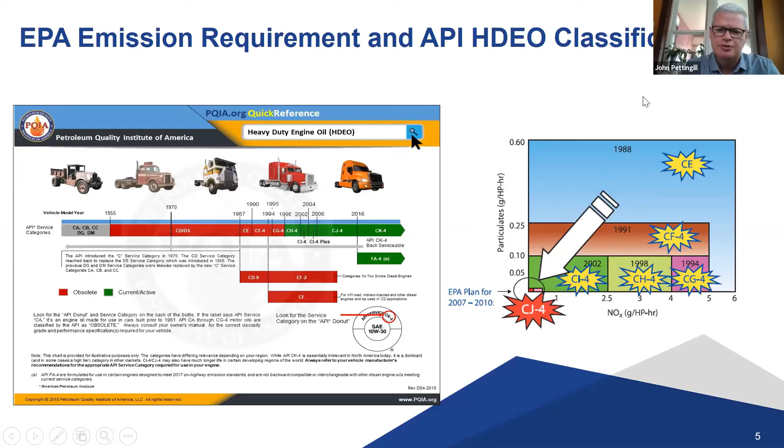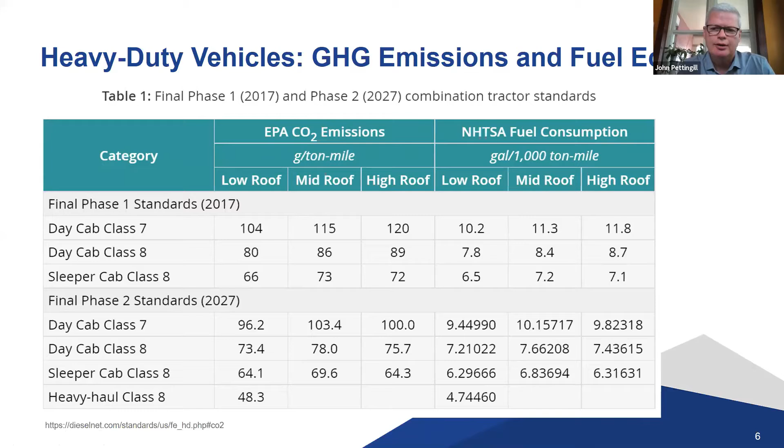And likewise, as CO2 emissions go down, fuel consumption has to go down as well. It's only logical—you burn less fuel, you make fewer emissions. This will be enabled by improved technology. The same thing is going on with on-road vehicles. There are some contributions that heavy-duty engine oils can make themselves, and we'll get into that a little more here, as well as in my presentation that follows.

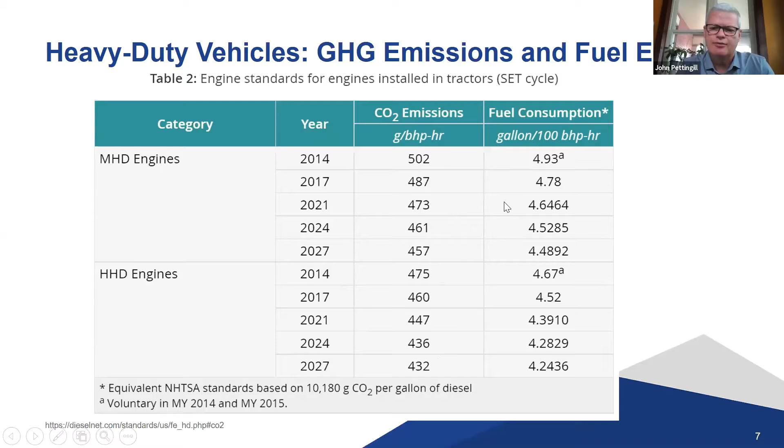So again, for either medium or heavy-duty engines, on a gram per brake horsepower hour basis, the emissions will need to come down. You see from 2014 to 2027 there's a change for these as well as heavy duty. They'll all be falling, as well as fuel consumption, and there will be these requirements to meet these new specifications.

So I talked about the evolution of heavy-duty engine oils and the technology that changes with them. The current specification in the heavy-duty world, the API specification as I mentioned, is CK4 and its lower viscosity equivalent, which is FA4. FA4 is the new fuel economy standard, which enables fuel economy essentially because it's lower viscosity.

So lower viscosity oil requires less energy to circulate through the engine. And if it requires less energy, it'll burn slightly less fuel. We'll get into some of the specifics of that in the following presentation. But what's important to know is that the requirements to meet the FA4 standard, and all the engine tests and bench tests, the qualification it has to go through, is as rigorous—it's identical to the CK4 test.

And if you're wondering, and you probably are, what's PC11 anyway, and why does it have this in parenthesis—it's because before a new oil category is officially adopted by the API, it's given a proposed category name. So that's what PC is: proposed category number 11.

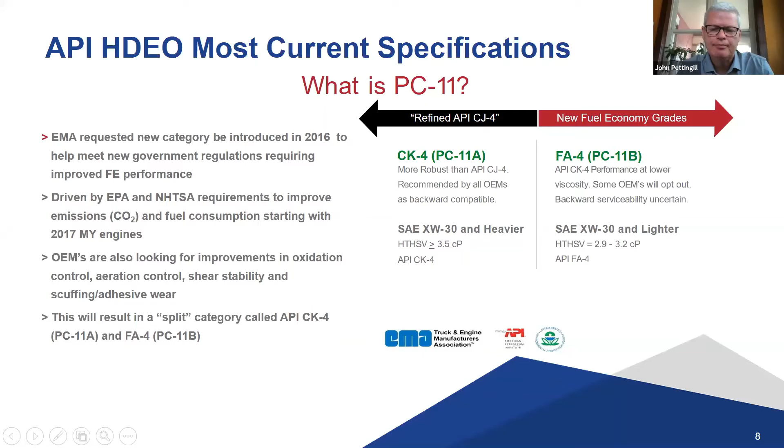So we have a split category, as I mentioned, and it resulted in what we have today as API FA4 and CK4. All right, so thank you for your attention on this one.

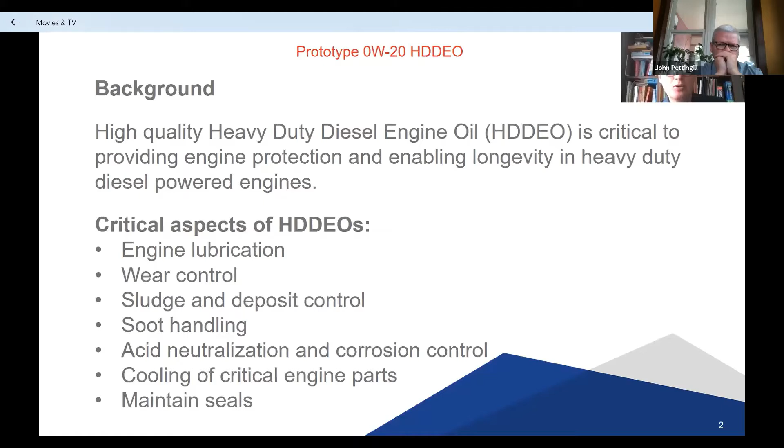Some of their critical aspects are engine lubrication, of course, the primary one, but also wear control, sludge and deposit control so that the engine runs as it should, operating properly. These diesel engine oils have to provide soot handling, acid neutralization, and corrosion control to prevent corrosion and rust in the engine. They have to provide cooling of critical engine parts, and they've also got to maintain seals.

But in addition to this, not just engine protection, but the engine oil itself must maintain performance characteristics. It's got to resist change in viscosity, so it doesn't go too much above or too much below its intended and designed grade. It has to control oxidation, which is more important now that engines are running hotter than they used to. It has to resist volatility at high temperatures so that it stays as a liquid, not going into the vapor state. And above all, it's got to maintain its function at wide temperature ranges, so multi-grade oils have to protect at very low temperatures as well as very high temperatures.

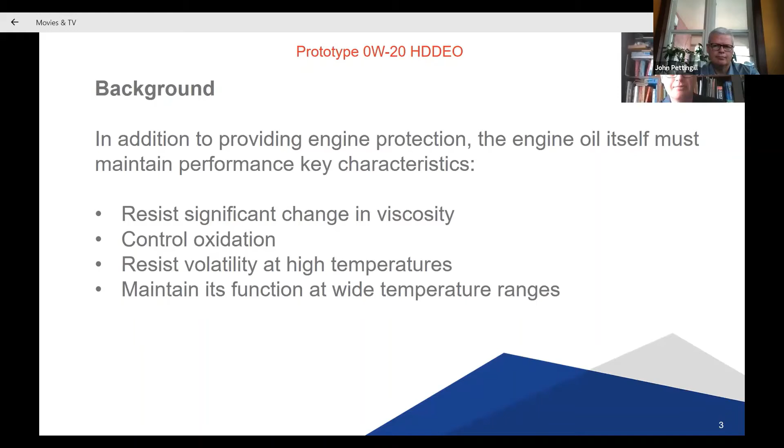So what's the case for lower viscosity heavy-duty engine oil? Well, lower viscosity engine oils enable improved fuel economy. Now, the lowest viscosity currently allowed for API licensed and OEM approved heavy-duty engine oils in the market today in North America are the API FA4 products.

They're available as 5W-30 and 10W-30 viscosity grades, defined by their HTHS limits of 2.9 to 3.2 centipoise. HTHS is high temperature, high shear - it's a simulation of viscosity at high temperatures under extreme loading conditions.

By comparison, traditional heavy-duty engine oils need to meet a minimum of 3.5 centipoise or higher, but that depends on their viscosity grade or OEM requirements. In some cases, those minimum requirements are 4.2 for, say, a 15W-40.

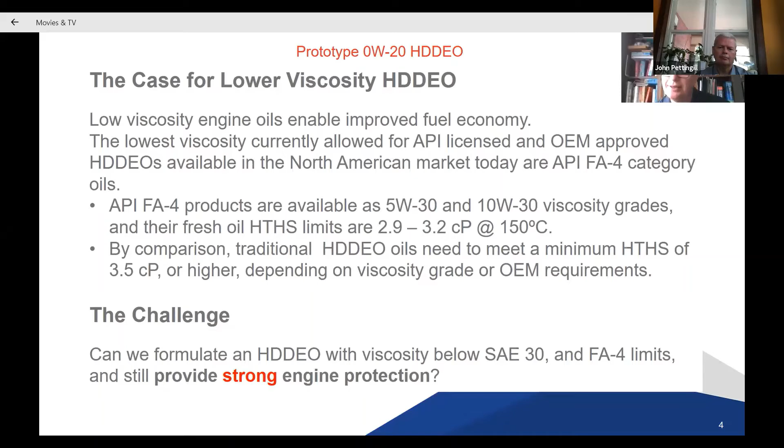So the challenge to us is, can we formulate a heavy-duty engine oil with viscosity below SAE 30 and FA4 limits and still provide strong engine protection?

Well, in addition to fuel economy benefits, lower viscosity engine oils that maintain engine protection reduce vehicle operating costs and improve vehicle exhaust emissions. You're burning less fuel, so it's less emissions.

So how do we know this? Well, within the engine oil business, there's general industry acceptance and agreement on the correlation of engine oil viscosity with fuel consumption - that lower viscosity engine oil enables improved fuel economy. Even in the case of FA4 oils, which were launched at the same time as the most recent category of CK4, there was no actual fuel economy test required to demonstrate fuel economy capability, because the industry consensus is very strong.

So where you have a higher grade with a higher HTHS, you will use more fuel compared with a lower grade having a lower HTHS. Depending on the application, these differences from, say, a 15W-40 to a 10W-30 could be 1%, or 15W-40 to a 10W-30 FA4 could be up to 2%, sometimes even more. It's very application dependent, and in the real world it's everything keeping all other things constant except for the type of engine oil. But this correlation is a good fit, and there's good industry consensus for this.

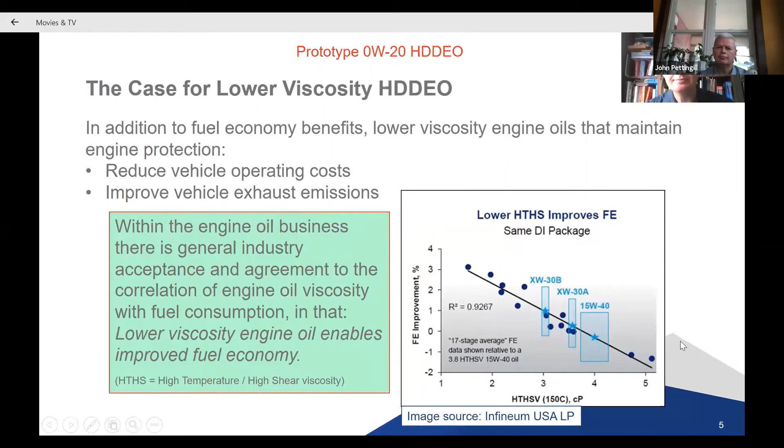So Petro-Canada Lubricants R&D has developed two prototype 0W-20 formulations for field trial evaluation. We evaluated our products in a field trial. Just note that there are currently no 0W-20 heavy-duty engine oils commercially available in this grade in the North American market.

So the viscosity grade is defined by its kinematic viscosity at 100 Celsius. The traditional grades that you're probably used to seeing are 40, 15W-40, or 10W-40, which are higher viscosity. There's been a recent industry acceptance and OEM approval of the SAE 30 grade, which includes 5W-30s, 10W-30s, et cetera.

So we are testing even lower to enable improved fuel economy in the SAE 20 region. Our two test oils that we are going to show you a demonstration for are in this area here.

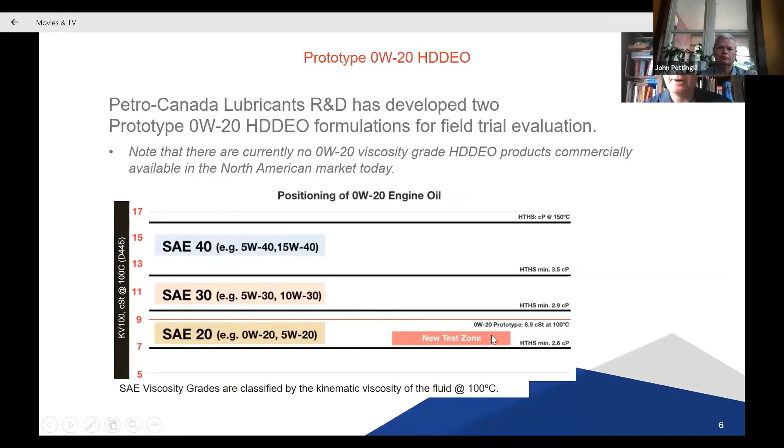But it's not that easy - there are formulation challenges. You don't want to just go into a test program or field trial without giving some thought as to what you need to still protect the engine. So the main formulation concerns in this case are the low HTHS value, because this could risk oil film strength required to protect critical engine parts.

And the base oil - the low base oil viscosity may also be a risk to film strength, and increased volatility of the oil under high operating temperatures and conditions. However, the risk has been alleviated in part with the use of proven performance additive technology that is common to API CK4 products.

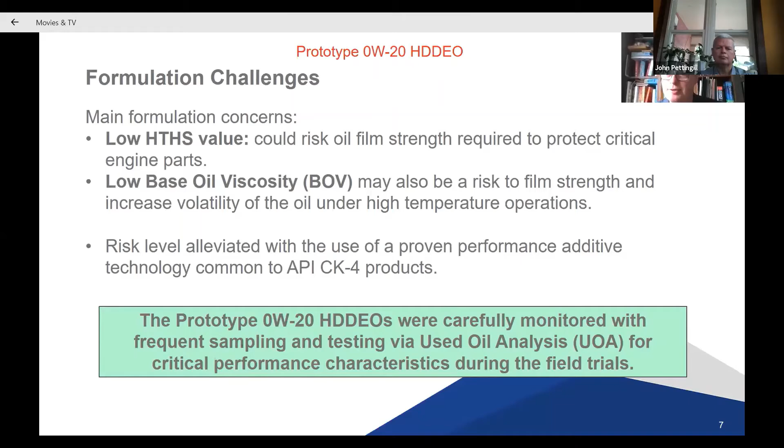So you go ahead and design the oil, but it's a very novel approach. And so the prototype 0W-20s were very carefully monitored with frequent sampling and testing through our used oil analysis program to check for critical performance characteristics during the field trial. You want to make sure that these oils are going to hold up.

Just looking at some basic formulation details - first of all, to eliminate potential bias when it comes to the testing, these were assigned test oil codes so that the people in the shop who were changing the oil in the trucks didn't know what these really were. We assigned test oil names gray and beige to them.

Now, because we're looking at two different 0W-20 formulations, they were equal in some aspects in that they both had the same base oil viscosity target and the same kinematic viscosity at 100. They both were made using group 3 base oils to meet the 0W and 20 requirement, and they both have the same performance package for additive technology.

They differ in the type of viscosity modifier used. Test oil gray has a comb polymer, whereas test oil beige has a star polymer. Otherwise, the physical characteristics needed to meet 0W-20 viscosity requirements are very similar.

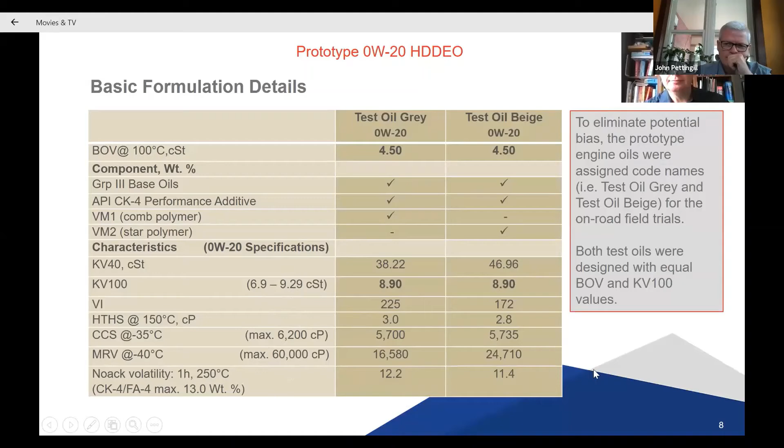Now, as I said, we did put these to the test, and they were really put to a severe test because we feel that if they can make it under really heavy conditions, then lighter loaded conditions shouldn't be a problem. Testing trucks were very similar to what you see here: ProStar International trucks equipped with Navistar MaxxForce N13 engines. The routes were long haul routes with maximum loading of up to 140,000 pounds gross vehicle weight. This is considered severe duty. They use a high amount of fuel because they're so heavily loaded, so this really puts the oils to the test.

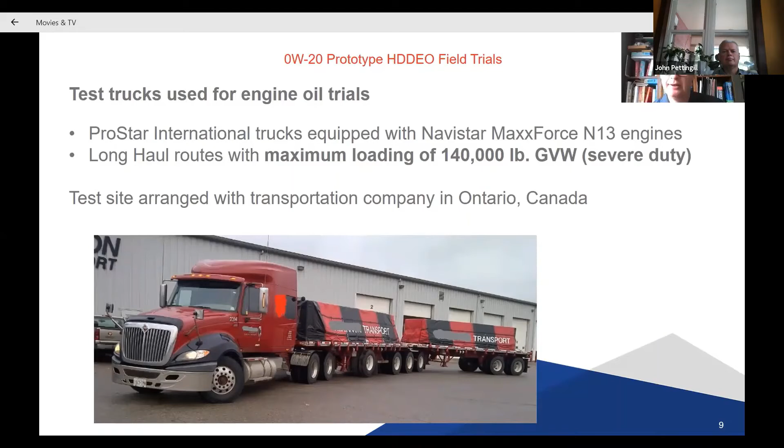And the testing site was outside of the Toronto area in Ontario, Canada.

So the data that you'll see in the charts represents used oil analysis data, test results for duplicate runs of both test oils in similar trucks operating under similar duty cycles. Since you're not used to seeing data for 0W-20s, for reference, the field trial data includes data from an API licensed FA4 10W30 oil, codenamed test oil amber. So we have our two 0W-20s, which are gray and beige, and then we compare them with amber. Our gray and beige are 0W-20, our amber is 10W30 FA4. The main base oil types for these are group 3, but mostly group 2 in the amber.

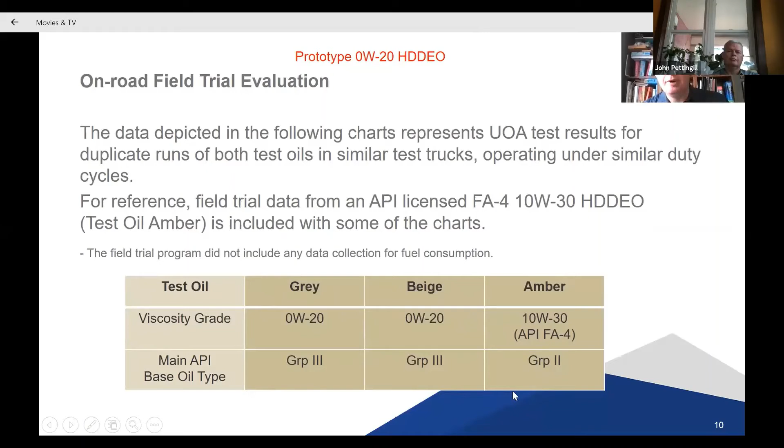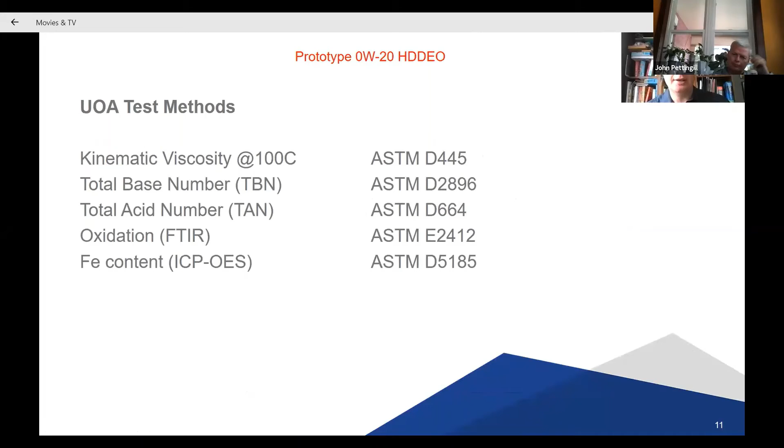The test methods chosen were common industry test methods that you would often see in used oil analysis reports for any other similar projects going on. So we tested viscosity, TBN, TAN, oxidation, and iron content according to common industry test methods.

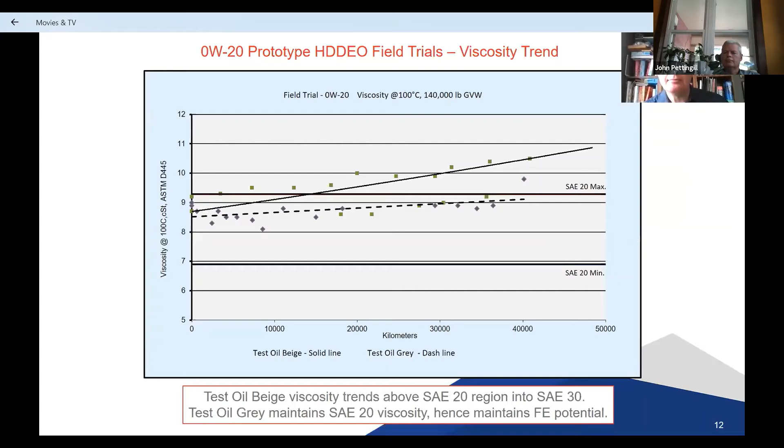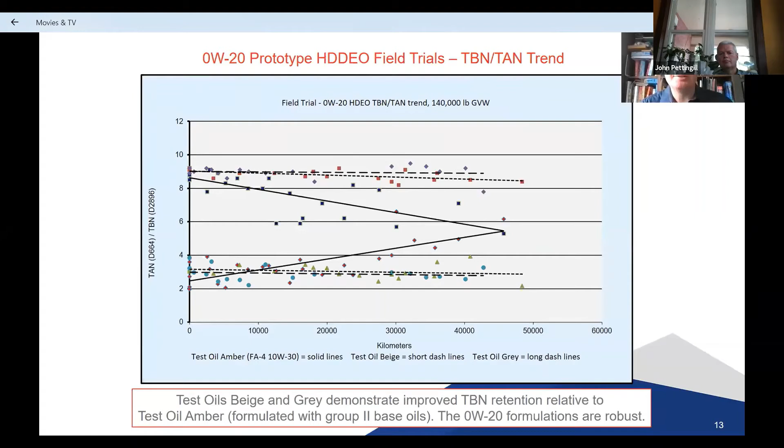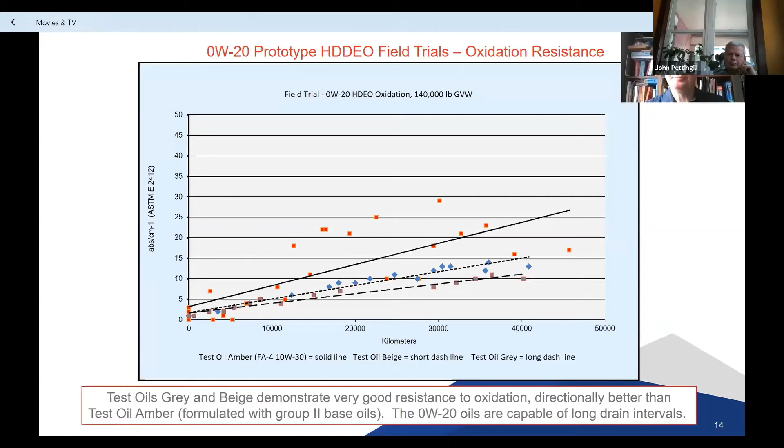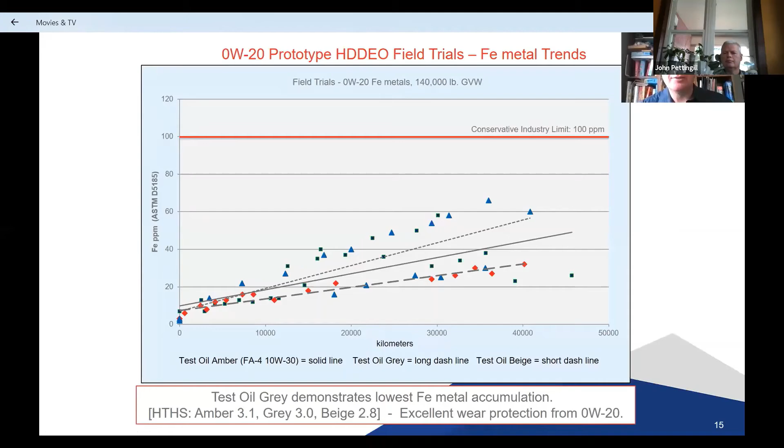So just in summary, when we look at the results, we see that test oil gray has demonstrated better maintenance of viscosity, which in turn should deliver better maintenance of fuel economy potential, because it remained in the SAE 20 region during the run, while test oil beige trended upwards into the SAE 30 region, which means it may have reduced its fuel economy potential.

With regards to TBN and TAN control, test oils gray and beige have demonstrated excellent TBN retention and TAN control relative to the FA4 test oil.

Now, the strong results for these 0W-20s may have been enabled by the Group 3 base oil content. With regards to oxidation, test oils gray and beige demonstrated excellent oxidation resistance relative to the FA4 10W-30 test oil. Strong results again may have been enabled by the high quality base oils. So the base oils you use to formulate your product are quite important when it comes to what the oil can do in terms of performance.

And iron wear metals, well, we see that test oil gray produced iron wear results better than FA4, while test oil beige were directionally the highest. But the main thing is we have demonstrated with on-road field trials under extreme maximum loads that solid engine protection is possible with a 0W-20.